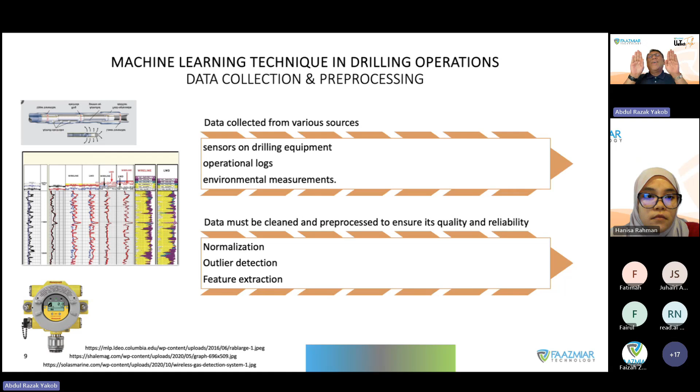Normalization is whenever, say for example, right now I think you are doing as well for your FDP, where you will take a look at the logs, and then you would try to bring the depth together, so that you are looking at the correct depth. That is one example.

And outlier detection - this is where the computer does it really well, faster than a human, although a human can do it as well. Whenever you have a group of data, it puts together that information and will detect: this information is wrong, this is wrong, this is wrong. So what do we do with it? Do we just take it out? Do we take out all that information, and suddenly the data becomes so choppy? Is that what we want?

So we, the humans, need to clean up and make the decision whether that particular data actually belongs there or not. How do we know that? Because we understand the data next to it. That is all we can do. As I mentioned, I have never sent anyone down the hole yet to actually take a look at what exactly is happening there. So what we can actually do is analyze whatever information we have in hand.

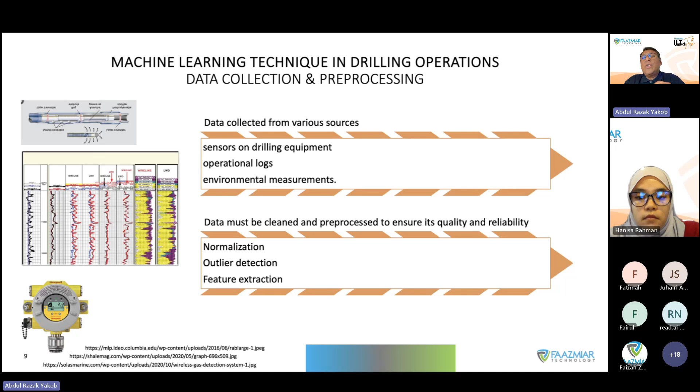So that is data collection and pre-processing. I wouldn't want to go into details here, but just to let you know, the key algorithms and models that we use, for example, regression models, because they predict anything that does not fall in line, and basically take a look at trend - for example, if the casing has worn out, it would be able to know because it plots, it searches out how long an equipment has been used.

So it searches for that data - when was the equipment used before, when was it manufactured, how many times has it been used, and in the last usage, how much wear was there? Based on the strength of the material we use, how much wear can we expect? What kind of forces or friction has the equipment gone through? So many questions, isn't it?

Don't worry, because the computer can actually handle that. But you will need to do the thinking, because I can only do so much. The new generations, when they take over, will have a lot more ideas and a lot more things that they want the computer to do for them. So that's why together we need to make sure we develop new technology for Malaysia. I hope all of you are with me in this.

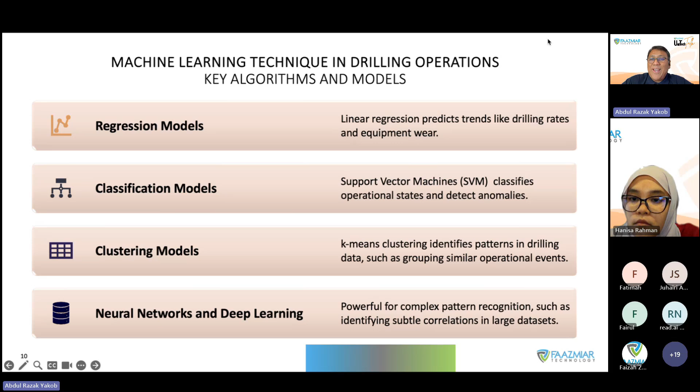All right, so real-time data. When we talk about real-time data analysis, we talk about what happens every 3, 5, or 7 seconds offshore, and we get to see exactly what's going on in real time. So how does real-time operations work?

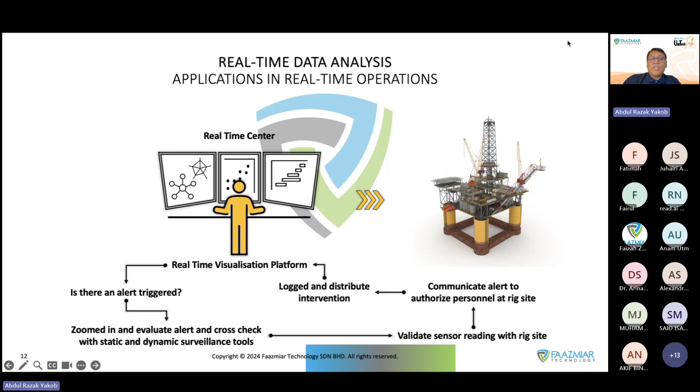Remember, the technology that we have here is number one for safety. We do not want any mishaps to happen, blow out or whatnot, we do not want that. So we use technology for safety, of course operations efficiency, because everything we do onboard drilling operations costs money, and of course the third is for us to actually have better cost efficiency.

So what contains in that real-time monitoring system? Number one is integrated machine learning models to analyze the data as it is collected. So you realize all this information from the sensors we have, from the tools we have, and from the things we are seeing at the rig site, those are integrated as part of the machine learning models.

It basically consists of sensors, data processing unit, as well as interfaces for operators. So sensors are put on the tool, and they bring in information real time. Previously, information was probably kept until you pull out the tool, but nowadays all of the information from sensors is being sent in real time.

Of course, there's the data processing unit, where you bring in all of this information. It will put it together in a table that is understandable, a chart which shows trends, and explains to you why things are that way.

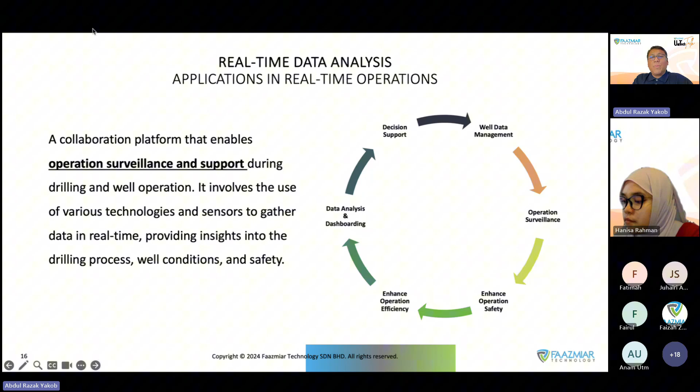All right, so applications in real-time operations, again about the collaboration platform. It is operation surveillance and support, because during drilling and well operations, it basically puts together a storyline of what is going on. For example, when we have well data management, it goes into operation surveillance, where we monitor the well, enhance operation safety, enhance operations efficiency, and have data analysis for us to take a look, so that we can provide decision support. This is done in real time.

So when we talk about real time, whatever is going on right now, we'll discuss a little bit more in the next talk with Tengku Azharuddin, who will be doing more about this topic and going a little bit deeper. That's the reason I'm doing this talk today, so it gives you the idea of what real-time operations and machine learning is all about, but we will talk more about this in the next talk. So if you have not signed up for the next talk, please do sign up, and if you have friends who are interested to join, please let them come in.

And applications in real-time operations are important because of predictive maintenance, anomaly detection, drilling optimization, and of course safety monitoring. Predictive maintenance is where, as we talked about earlier, equipment wear and tear matters, because machine learning can predict equipment failures before they happen. The machine, the computer, would know what kind of material it is, how long it lasts, how long it's been used, what kind of environment it was used in before, and what the condition was at the last usage, and it can calculate for you how long it can actually last. So all of this information is very important in predictive maintenance.

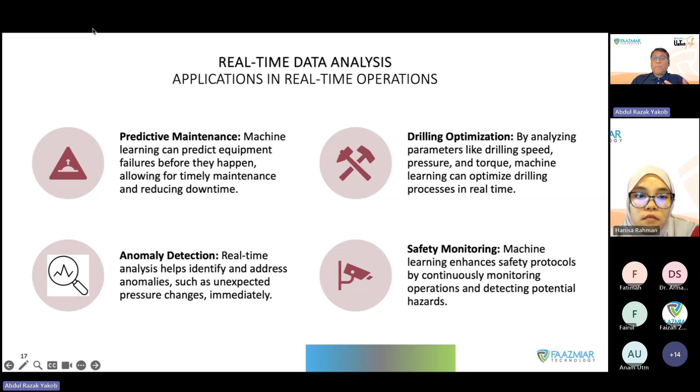Nowadays, you even have cameras that can detect human beings, whether they are wearing a helmet, whether they are wearing proper shoes, and so on. Technology has developed quite far, where you can actually do a lot more with this information.

Some of the examples you will be seeing are important if you work in drilling, as a petroleum engineer, drilling engineer, reservoir engineer, production engineer, or even petroleum economics engineer. All of this information is important, because it will help you understand what kind of problems you are seeing. When you are in a team, this information is not just for drilling engineers or reservoir engineers - it's important for the whole team.

So advanced real-time operation data display gives you a lot of these colorful pictures, but you need to understand what these colorful pictures actually carry.

For example, if you need information on cement integrity - after you have cemented, whether the cement has actually covered the hole - you can have that as part of this squiggle line.

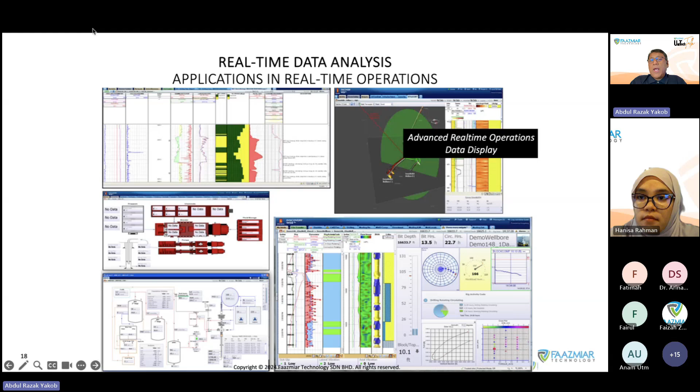Because of the layers of the surface that are not rough, it will let the bit turn really, really fast. So that indication, that information, will still need you as an engineer to figure out, and it will help you understand more of what is going on downhole - important for you to understand in order to make a good decision of what to do. Also, visualizing subsurface risk from adjacent historical wells.

When you are able to put together all of the offset wells drilled previously from around that location, you will be able to understand: you are drilling into this particular depth, and I'm expecting that. But you do have to make sure you have aligned it correctly. I think this is the process you do as well for your FDP.

I hope all of you have done it by hand so that you really understand what is going on and how basically this is done, because you can always do this using the computer nowadays, and it is much easier - you can even let the computer figure out whether it needs to adjust much faster.

Amazing, isn't it? So operational annotation, comment, and pre-drill identified risk, as well as what kind of formation marker, and where that formation marker is. I'm not seeing that formation marker at this particular depth - probably it's at a different depth. Why is it at a different depth? Because formations are not like straight horizontal lines - they go up and down and so on.

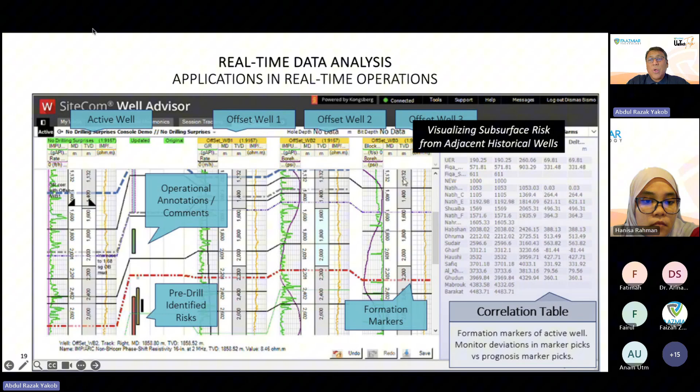So, visualizing subsurface risk from adjacent historical wells. And of course, mobility is really important nowadays, because whenever you put together a facility to help engineers or managers understand what is going on offshore - previously I would call offshore like every 2 hours to know what the update was.

But for now, all I have to do is open up my mobile phone, go into the applications, and look at the charts as well as the numbers to see what exactly is going on with the operations. That's what technology gives us - it gives us the ability to monitor the operations.

I can monitor it not just in KL, because previously, whenever I was on weekend duty, I had to be within 10 kilometers of the office, because if anything were to happen, everyone needed to gather. But nowadays, if something happens, we can have a real-time operation center handle it, or if it becomes very crucial, we can all gather on Zoom or Microsoft Teams. But if you have the older generation, they probably prefer to work together face to face.

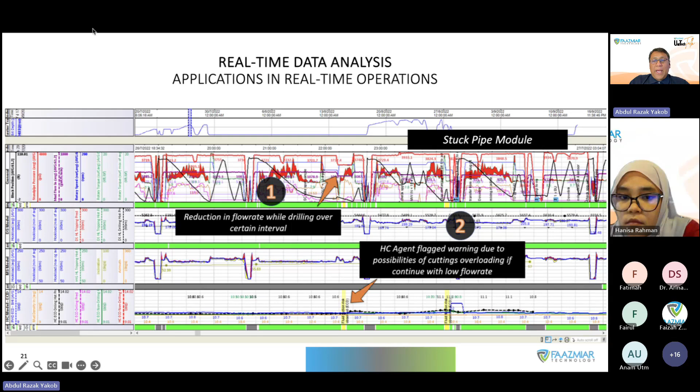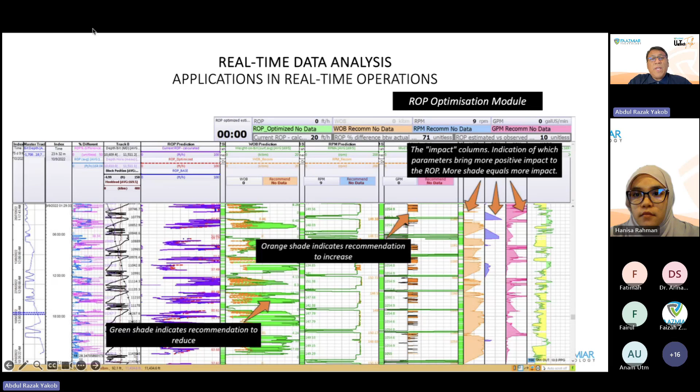And of course, the ROP optimization module, because as you are drilling into a certain formation, the ROP shifts differently. If you are at a different angle, the ROP will indicate differently. And under certain conditions it will give a different kind of ROP, meaning it slows down even after putting in the same amount of force. So it is really important for us to maintain the ROP so we understand what is going on downhole, so that we can make better decisions. What is a better decision? Can we actually drill it faster? Am I going to get into problems if I go in faster? All of that information will be made available to you.

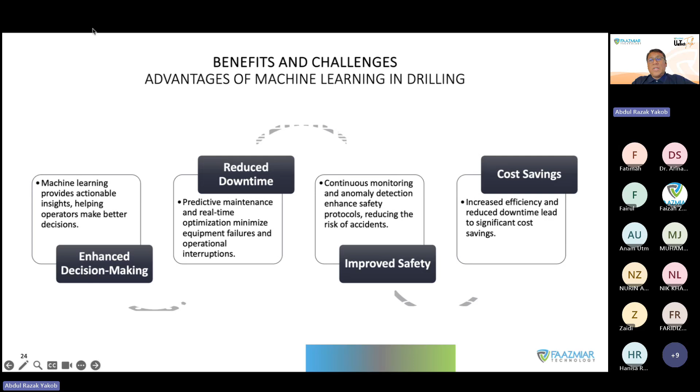It reduces downtime, because you have preventive maintenance, letting the computer predict whether your tools can stand a little bit longer or not. And of course it improves safety, as I mentioned earlier, because it stops the risk or the problems before they happen. For example, with enhanced predictive maintenance, if I have done the maintenance properly, I will not have equipment failure downhole. But sometimes it still happens. Still, it reduces the chances of equipment failure downhole, and it stops safety issues from happening. Of course, cost saving follows, because whenever you increase efficiency and reduce downtime, it leads to significant cost reduction.

And of course, there are challenges and considerations you probably want to have when you get into the industry: data quality and availability. You have to make sure the data quality is there, because high quality data is crucial for effective machine learning models. Wrong information learned by the machine will become part of its decision making or recommendations. So it is very important to make sure everything is considered. Integration with existing systems is also very important, because it has to follow the workflow and system that is already at the client side.

Whenever we put together a system, we have to learn what the client side has been doing, because when the client fits into the workflow, it basically increases efficiency.